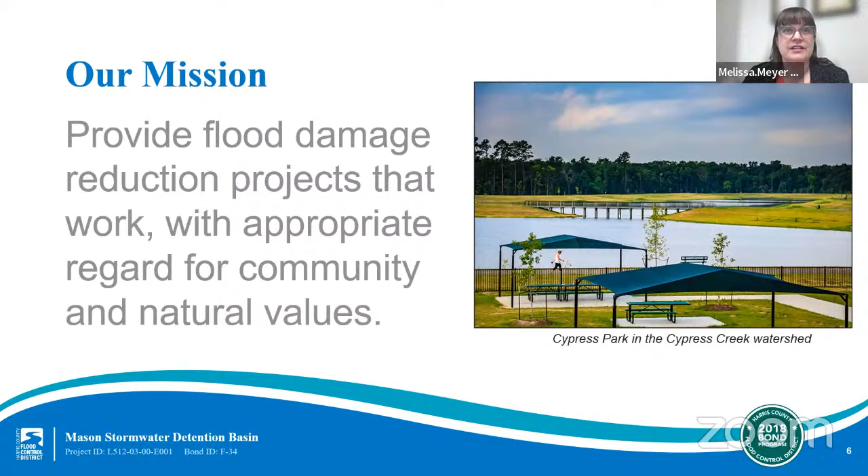Harris County includes 23 main watersheds totaling approximately 1,800 square miles and more than 2,500 linear miles of channel. 2,500 linear miles is approximately the distance from New York to California. A watershed is a geographical region of land that drains to a common channel or outlet, and each watershed has its own unique characteristics and needs. The project we are presenting on tonight is in the Little Cypress Creek watershed, located in northwest Harris County.

Harris County and our surrounding area is flood prone for a number of reasons. Namely, we experience rainfall events, including tropical storms and hurricanes. Our area is largely made up of flat and slow draining land. And finally, we see large concentrations of clay soils that do not soak up excess rainfall quickly.

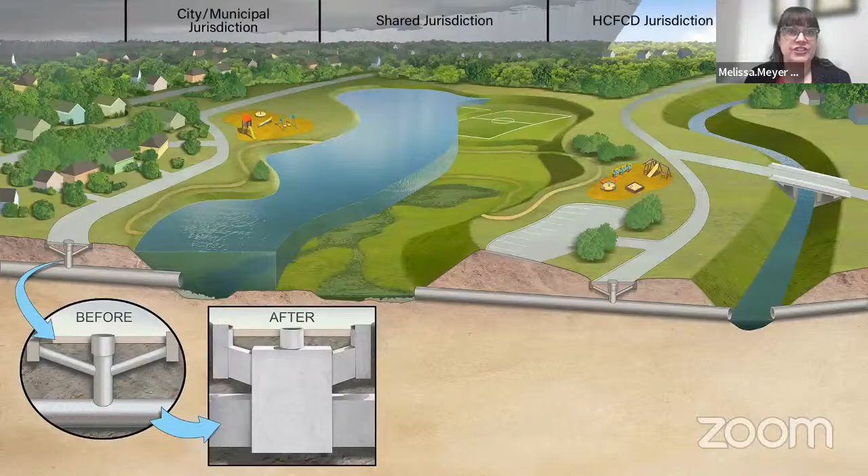On August 25th, 2018, Harris County voters approved $2.5 billion in bonds for flood risk reduction projects. This vote followed a series of 23 meetings with community members across Harris County, one per watershed, which resulted in...

...a list of what is now 181 bond projects. As of August 25th, 2021, every project included in the 2018 bond program has been initiated, including the 10 projects in the Little Cypress Creek watershed.

A total of more than $1.7 billion in partnership funding has been secured so far to stretch the 2018 bond program even further. The actual timing of each individual project will depend on a variety of factors, including environmental permitting,

right-of-way acquisition and utility relocation, and in some cases, the requirements of a particular grant. As bond projects move forward, we're making significant progress towards resilience in Harris County.

We shared an update with the Harris County Commissioners Court in January of this year, and we highlighted a few notable stats. So far, we have completed or closed 29 projects.

We've secured $1.7 billion in partnership funding to stretch the bond funds even further for our communities, and we've hosted more than 180 community engagement meetings. Your input is critical to our efforts, and we want to ensure that our conversations continue.

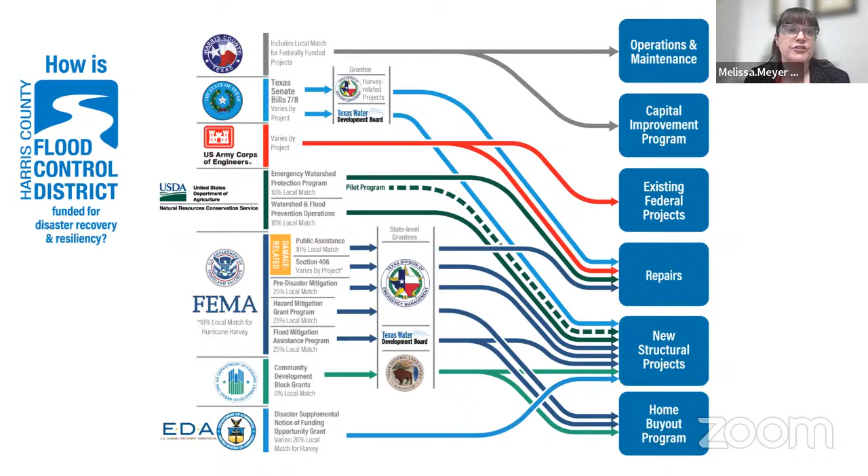We'll now move on to the part of the program that's specifically about the Little Cypress Creek watershed and the Mason Stormwater Detention Basin. As a reminder, we are looking for your input as we discuss this project in more detail.

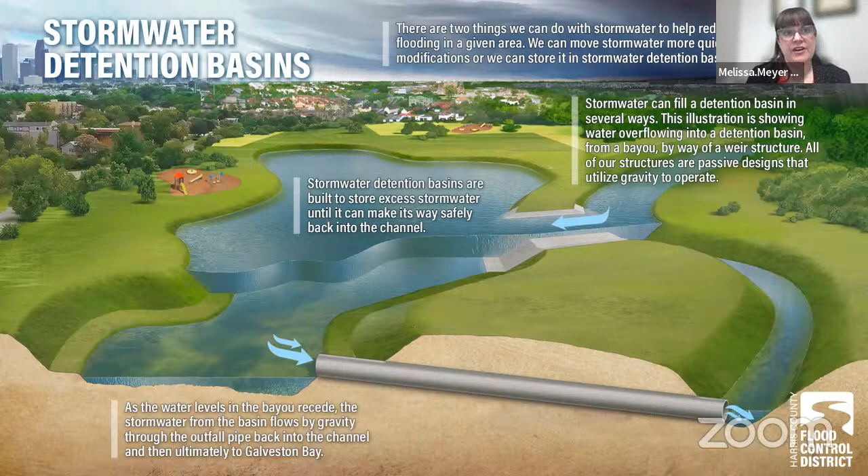This illustration shows stormwater overflowing into a basin from a bayou by way of a weir structure. And as the water levels in the bayou recede, the stormwater basin drains by gravity through the outfall pipe and back into the channel.

A weir, or a structure that regulates the flow of the stormwater, will also be constructed on the southern tip of the stormwater detention basin, and that will allow water to pass into the adjacent proposed Mueschke West stormwater detention basin south of Bauer-Hockley Road via tributary L112-00.

Here are the project benefits once the basin is constructed. The basin will remove the 100-year area of inundation from 53 structures in 229 acres, and also lower the 100-year storm event water surface elevation by 11 feet.

Though 53 structures may not seem like a lot, it's important to remember that the area around the basin is sparsely populated and developed, and the purpose of the basin and the projects within the Frontier program is to build flood mitigation projects ahead of development.

Little Cypress Creek is unique, and developers participate in the Frontier program by paying impact fees as well as excavating within Harris County Flood Control District right-of-way to mitigate for their own developments.

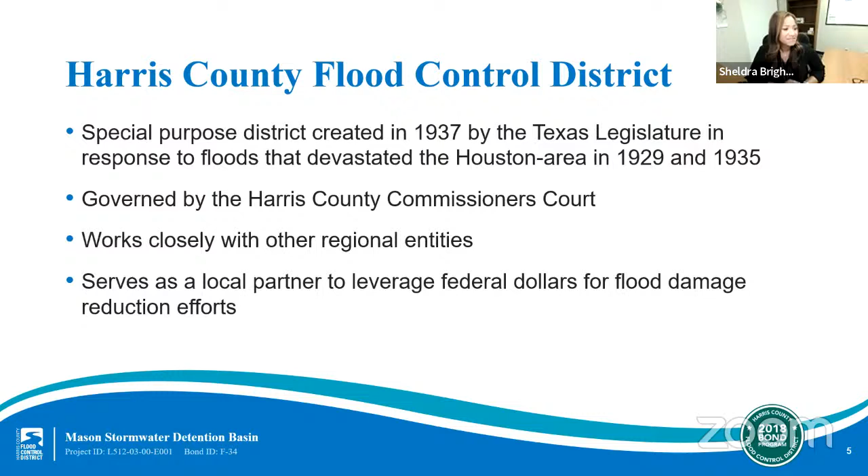Thank you, Melissa. Will this project eliminate flooding altogether? That's another one that we get a lot. Yeah, so although this project will reduce the risk of flooding in the area, the risk of flooding will remain. Harris County Flood Control District recommends that everyone in Harris County and surrounding areas have flood insurance to insure against the possibility of personal and financial loss.

You can go to hcfcd.org/maapnext, that's MAAPNEXT, to learn about the Flood Control District's MAAPnext initiative, which aims to produce Harris County's most comprehensive and complete set of flood hazard maps and information.

Thank you, Melissa. Let's see, we received a comment about yard signs announcing tonight's meeting. Those notices were placed in the right-of-way to let people know about tonight's meeting. So please know that those yard signs will be picked up promptly following tonight's meeting, so that won't clutter the area. That was just giving notice about our meeting tonight.

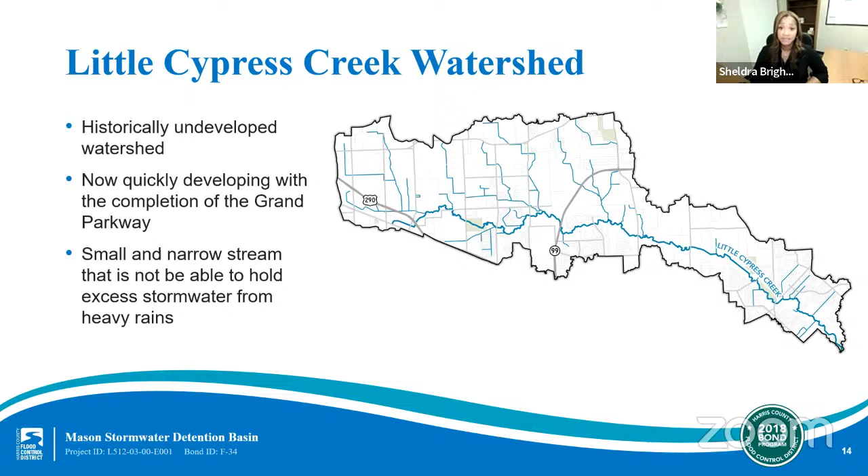Good deal. Once completed, what benefits will the Little Cypress Creek Frontier program provide? So once complete, the requirements of the Little Cypress Creek Frontier program could result in up to 6,000 acres no longer inundated during a 100-year Atlas 14 event. The 100-year floodplain removed from 3,200 structures, and a total storage volume of up to 22,000 acre-feet of stormwater detention across 9 proposed regional detention basin facilities.

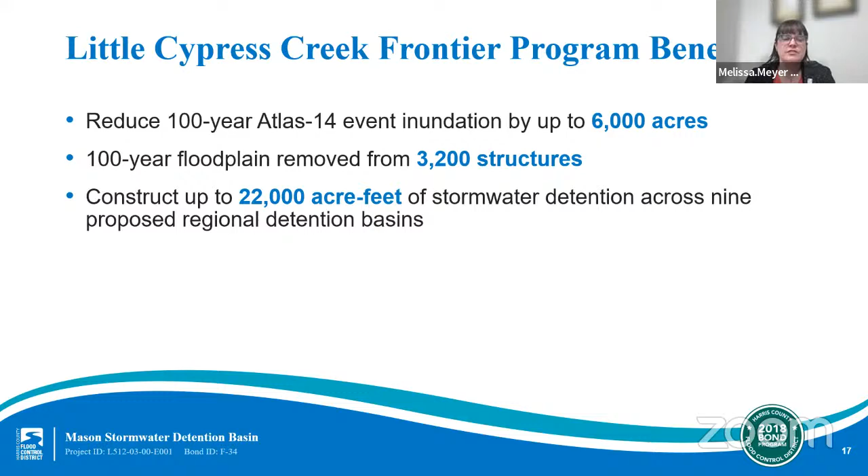Where is the Mason Stormwater Detention Basin located? This project is located near the intersection of the Grand Parkway and Bauer-Hockley Road, at the confluence of 3 Little Cypress Creek tributaries.

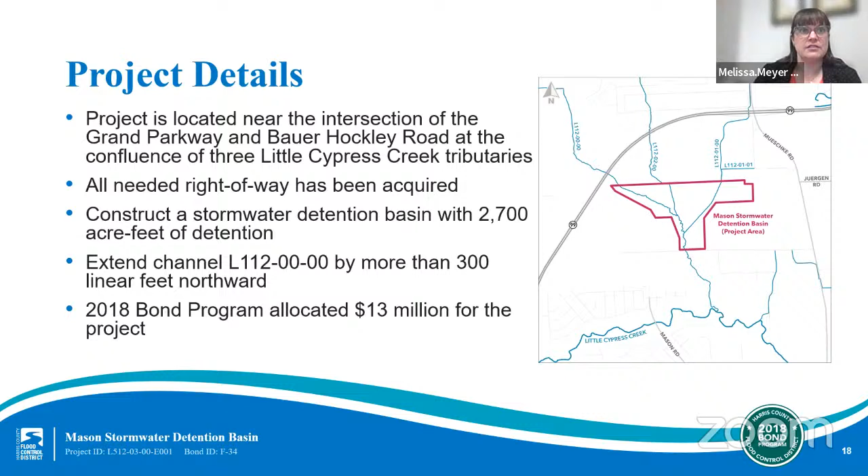The stormwater detention basin will generally be a dry bottom basin with stormwater quality features throughout the site, as shown in green on the map to the right. A weir, or a structure that regulates the flow of stormwater, will be constructed on the southern tip of the stormwater detention basin and will allow water to pass into the adjacent proposed Mueschke West stormwater detention basin south of Bauer Hockley Road via tributary L112.

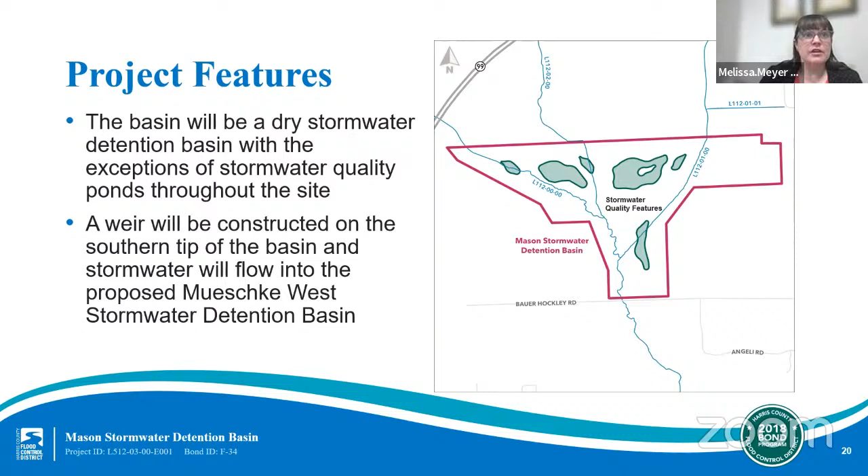Here are the project benefits once the basin is constructed. The basin will remove the 100-year area of inundation from 53 structures and 229 acres, and it will also lower the 100-year storm event water surface elevation by 11 feet.

Though 53 structures might not seem like a lot, it is important to remember that the area around the basin is sparsely populated and developed, and the purpose of the basin and the projects within the Frontier program is to build flood mitigation projects ahead of development.

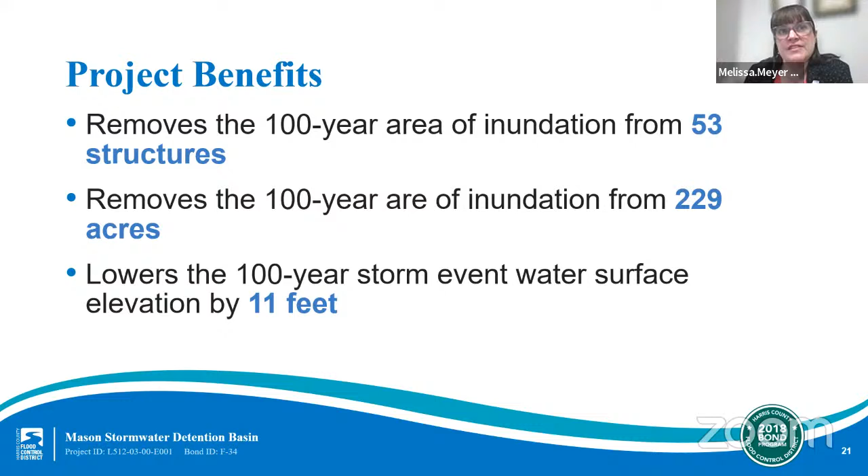This means the project is now in the design stage, during which our engineering teams will prepare construction plans, specifications, and more detailed cost estimates. On other projects, this stage might overlap with right-of-way acquisition and utility relocations, since those activities could affect final design considerations, and periodic reevaluations may also affect final design.

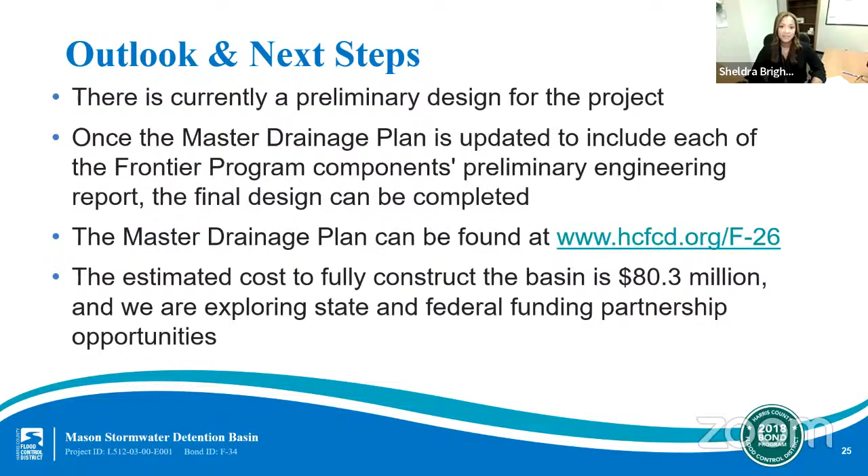That's a really good point. Will there be any developers contributing to the excavation efforts of this project? Yes. Next summer, crews will begin excavating on a set footprint within the overall Mason Stormwater Detention Basin footprint. They're going to excavate 402 acre-feet of detention, about 20% of the full detention volume of that basin, at little to no cost to the flood control district.

And what is the current life cycle stage for the Mason Stormwater Detention Basin project? This project has previously completed the preliminary engineering stage, which resulted in a preliminary engineering report being transmitted to the Harris County Commissioners Court with the recommended projects. We've also acquired the right-of-way, and now the project is in the design stage, during which our engineering teams are preparing construction plans, specifications, and more detailed cost estimates of the project.